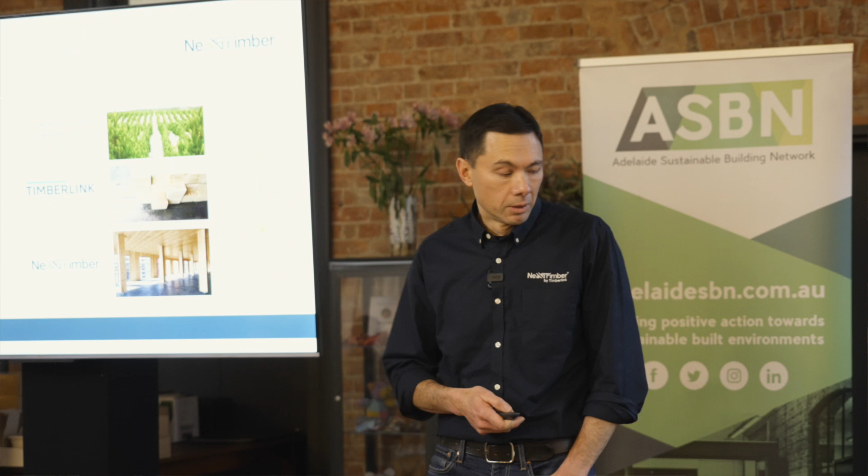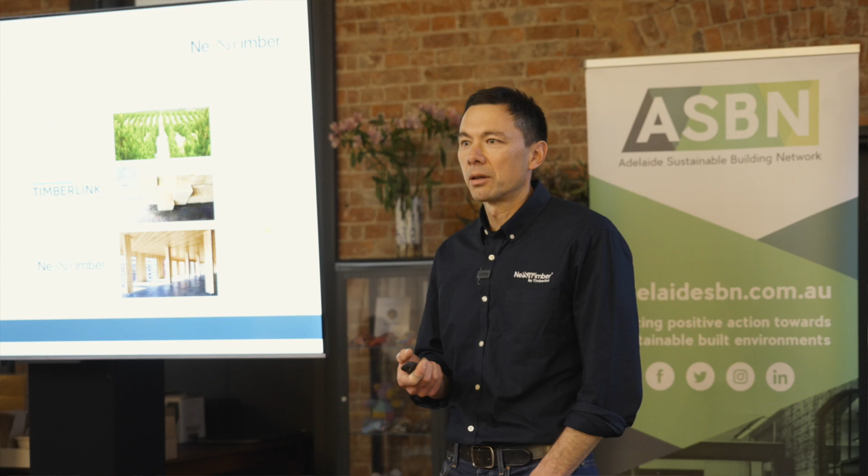Just a little bit about us as a business. Timberlink, we're in the middle - that's who I work for. NeXTimber is our business down the bottom, which is in the process of commissioning a new $60-odd million plant to build cross-laminated timber and glue-laminated timber. I'll go into that in a bit. But we're vertically integrated essentially with the plantation owners, so we're all owned by investment trusts managed by New Forests, now the second biggest forestry management company in the world. They manage about 10 billion of Australian and global funds.

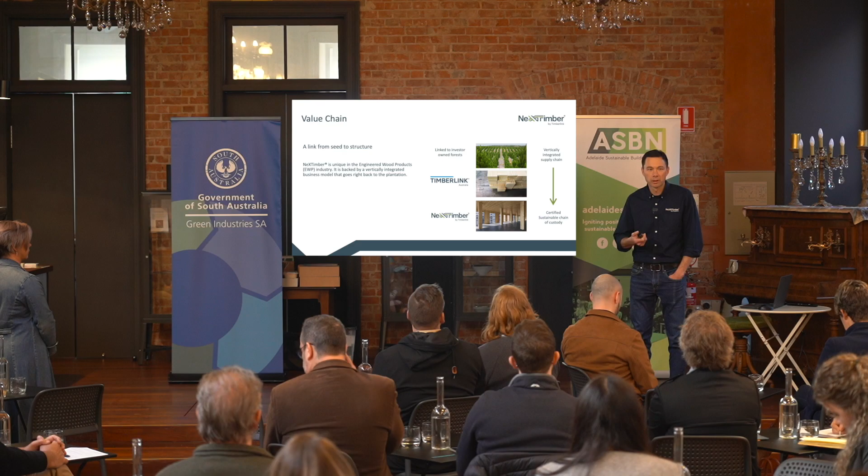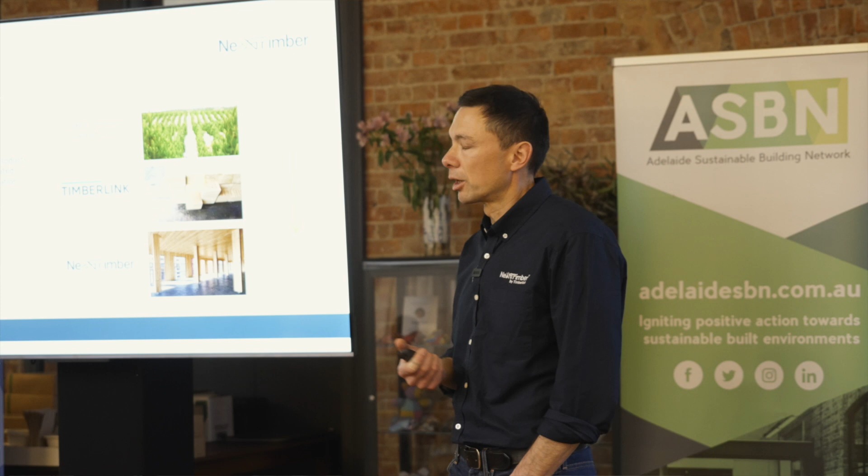Their initial differentiator in the investment market was around their sustainability, so they've been a huge supporter of what we do. Probably the other part of this supply chain is that it's going to enable us to have FSC and PEFC certification from beginning to end on the product. I can't claim that on the NeXTimber product yet because it's not being manufactured, but that's the intent - the feedstock's all going to be certified, and once we're underway, the product will be certified as well.

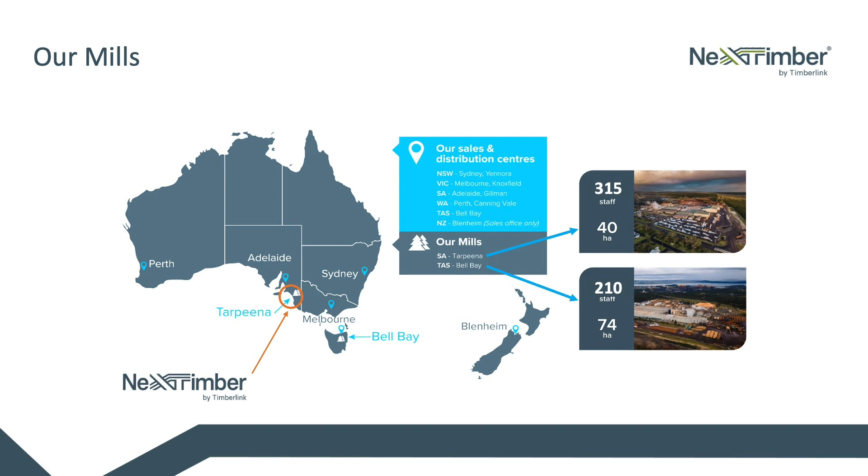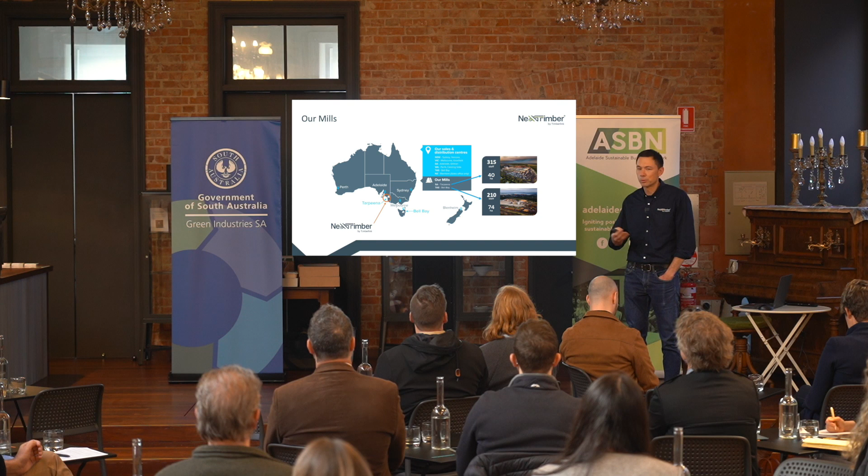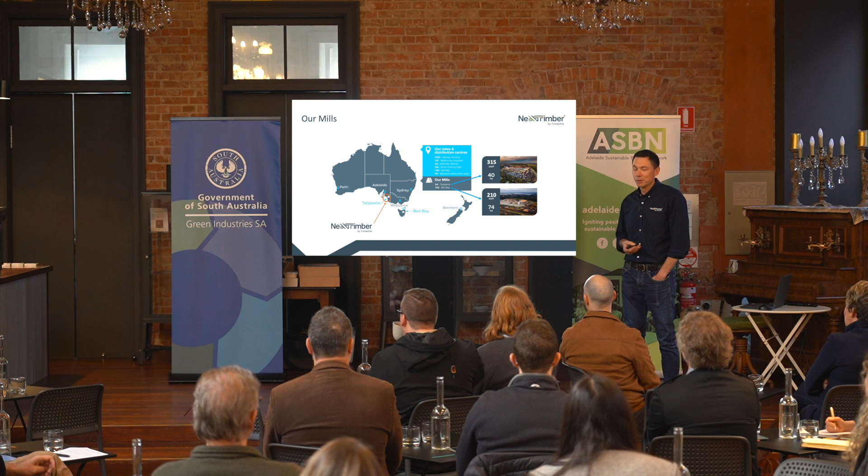We've got 2 manufacturing facilities and in total about 600 staff now. The manufacturing facilities are in the north of Tassie, that's where I'm from, and Tarpeena in South Australia, up near Mount Gambier. We're producing material from about 1 million tonnes a year of log. These are high-tech facilities - we use laser scanning, acoustic scanning, high-speed colour vision, all that sort of stuff. There's a lot of technology in these mills, it's not just a bunch of people with some big saws. It's a very capital-intensive industry - in 10 years of Timberlink, we've reinvested about 200 million into the business on some big upgrades and also some incremental work.

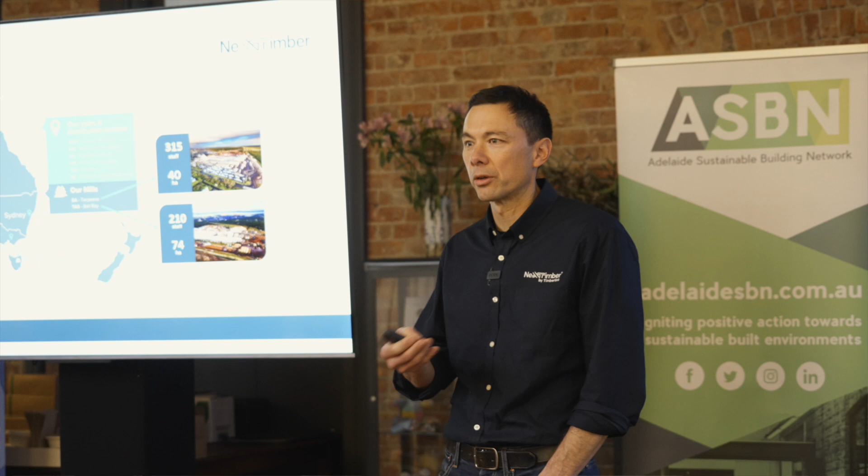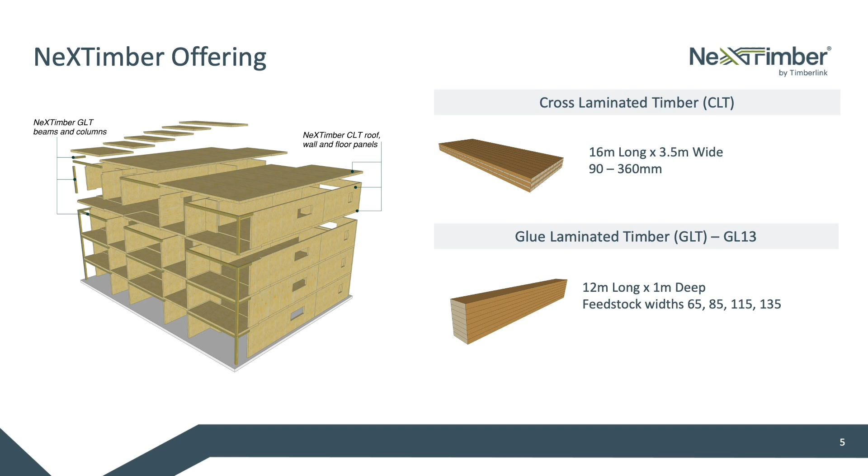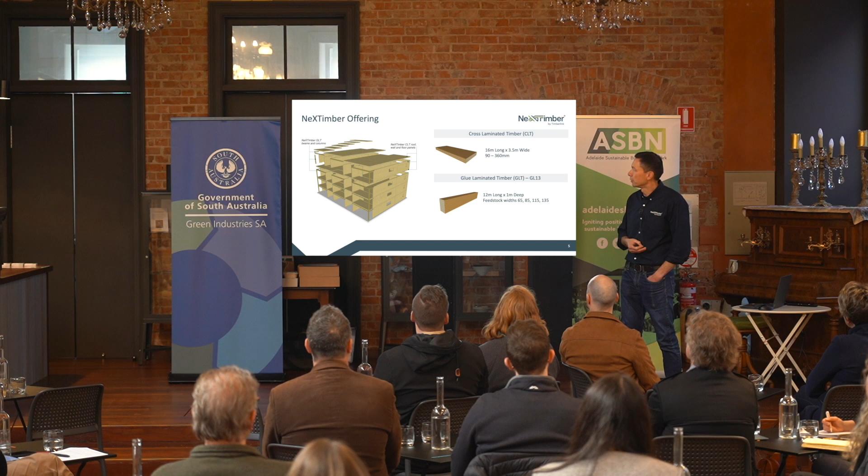This is the NeXTimber offering, a new facility at our Tarpeena plant. To give you an idea of scale, the building's 200 metres by 40 metres, a 63 million investment in total. We're producing 2 product lines: glue-lam timber beams, which you'd be familiar with for beams and columns - we'll be able to make them out to 12 metres long, 1 metre deep, straight or cambered. And cross-laminated timber, which for those not familiar with it, is big timber slabs used typically in multi-storey construction in place of concrete. The billets can be up to 16 metres long, 3.5 metres wide, 360 deep.

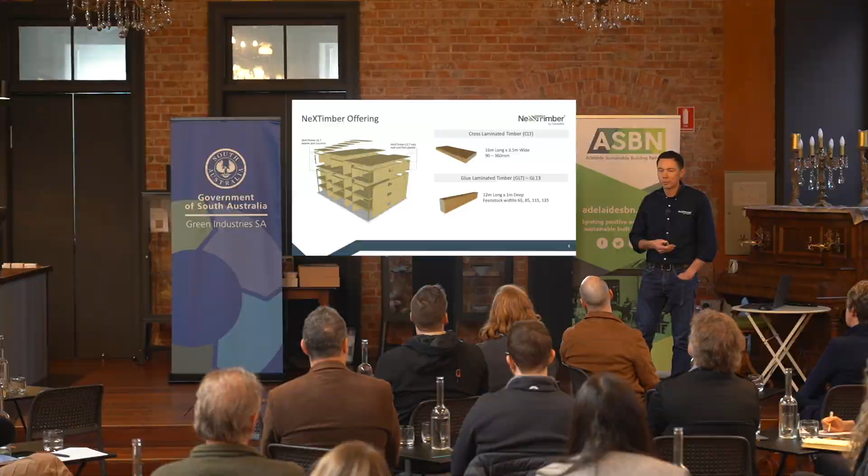As an anecdote, there were 3 of us that did all of the plant procurement and everything for this plant, and we did the whole thing over COVID. So when everybody's talking about the change in ways of work - to go from a mode where if we were spending that sort of money we'd have people backwards and forwards to Europe or the US - we could spend that amount of money with a high degree of confidence just from interacting with people on the internet and swapping 3D models of the factory. We're about to commission it, and so far it's been very successful.

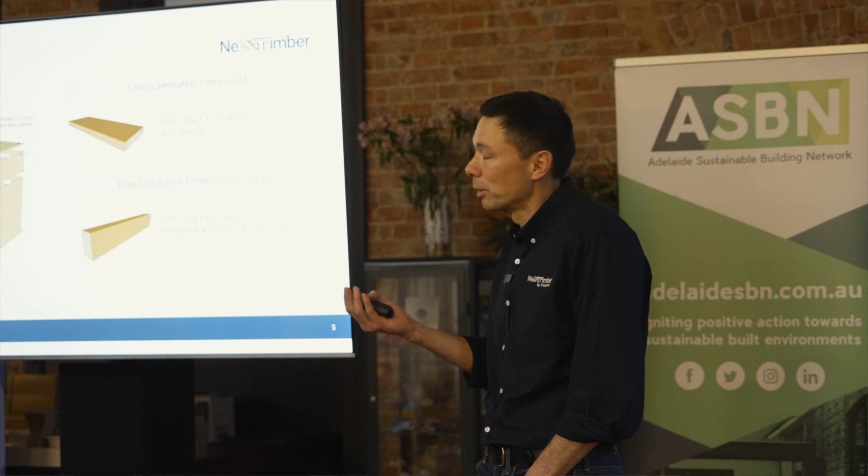I wasn't allowed to show you up-to-date photos of what it's like inside, but I'm sure once we've been running for a while and we've had a few visitors through, we'll be more than happy to run tourism packs for the right people. Everybody loves industrial tourism - even those who think they don't, they love it when they get there.

Technical resources - early on in the project, we sent a whole bunch of our material to a plant in Europe that had the same equipment and used the same adhesives, got a bunch of product made, brought it back and did all of the structural, fire, and acoustic testing. That's all now available. We've just released environmental product declarations - I'll talk about those in a bit of detail in a second.

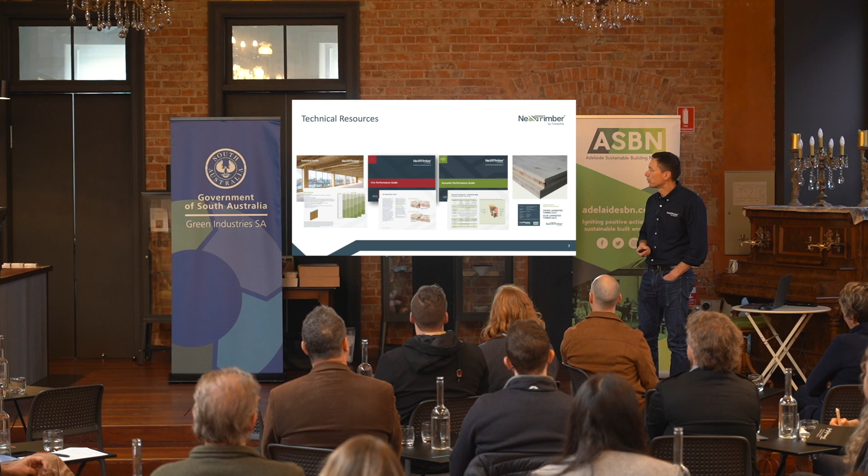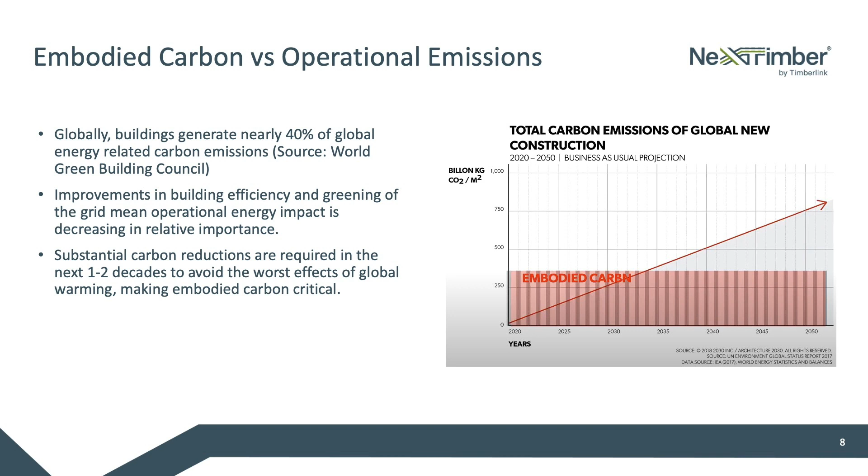And then here starts the meat of what I wanted to talk about from a technical point of view. You'll probably all be aware globally buildings account for somewhere around 40% of energy-related carbon emissions.

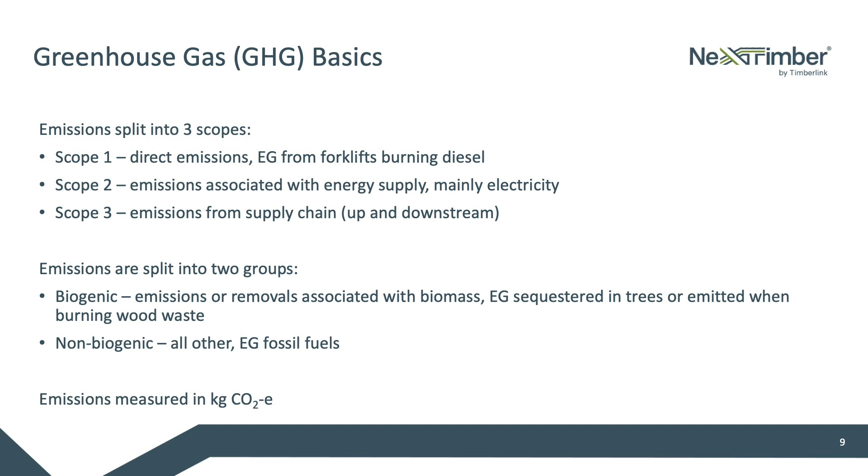As we heard in the last presentation, even refurbished buildings are now reaching really high levels of operational efficiency in terms of energy use. So the more efficient we are at using energy within buildings, and the greener the energy that goes into the buildings, the more important the embodied energy that goes into the building and construction becomes.

I guess as somebody mentioned before, we're having to turn this marathon into a sprint. We've only got a couple more decades to really make an impact.

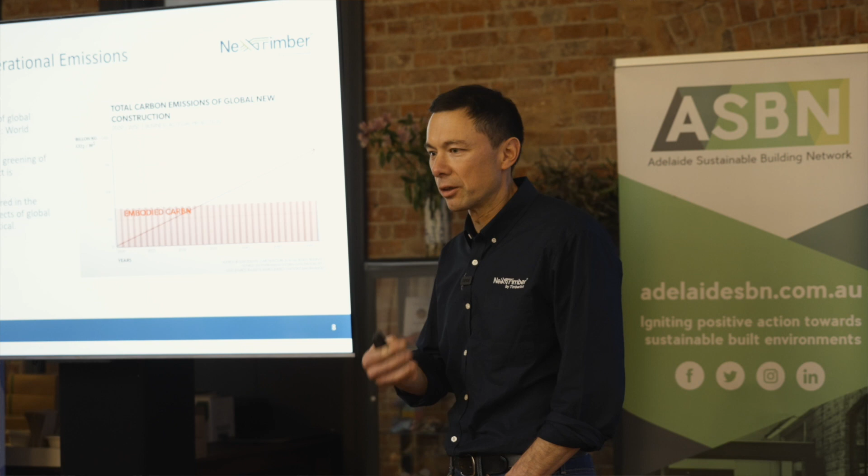I'm probably just preaching to the converted here, but just in case anybody's not 100% across this stuff, I will use a couple of technical terms.

So three scopes of emissions. Scope 1, us burning diesel. Scope 2, us using electricity. Scope 3, everything in the supply chain. For us, Scope 3 is around 99% on our latest footprint. So huge, but Scope 1 and Scope 2 is what you can control generally.

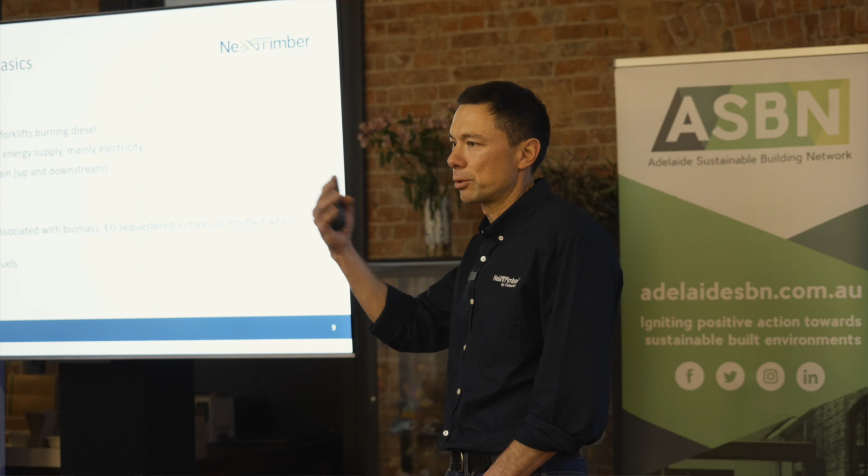And then importantly, think about your emissions in two groups. So biogenic - trees absorbing CO2 out of the atmosphere, turning it into a solid product, that's biogenic sequestration. Burning wood in your fireplace, that's a biogenic emission. And everything else, which is fossil fuels related.

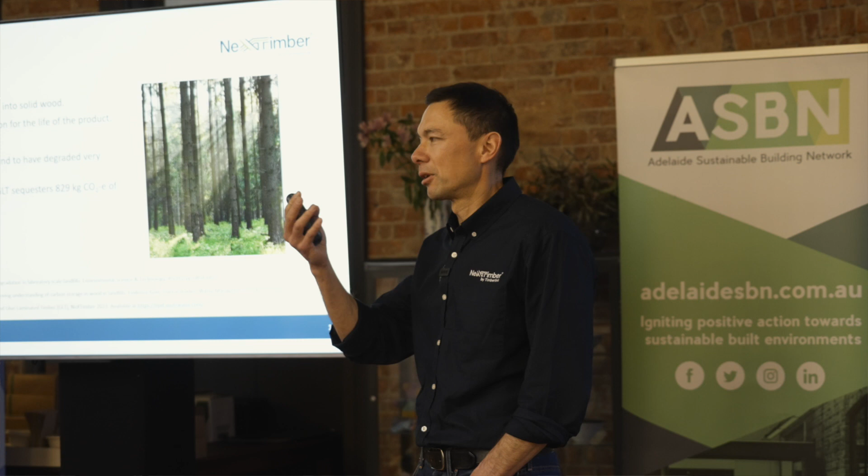So some basics, doesn't get much more basic than this, I suppose. When a tree grows, it sucks in carbon dioxide from the atmosphere, turns it into solid wood. If you look at IPCC reports...

There's another report, I can't remember the guy's name, but talking about ACCUs. This is really the only meaningful way we have of capturing carbon dioxide at great volume at the moment, through forests or woody biomass.

When these trees grow, they convert atmospheric CO2 into solid wood. We turn that wood into wood products, and then that biogenic carbon is sequestered within that product for the life of the product. So the more of that wood we can turn into long-lived building products, and the less into tissue paper, the better. That's a strong driver for us.

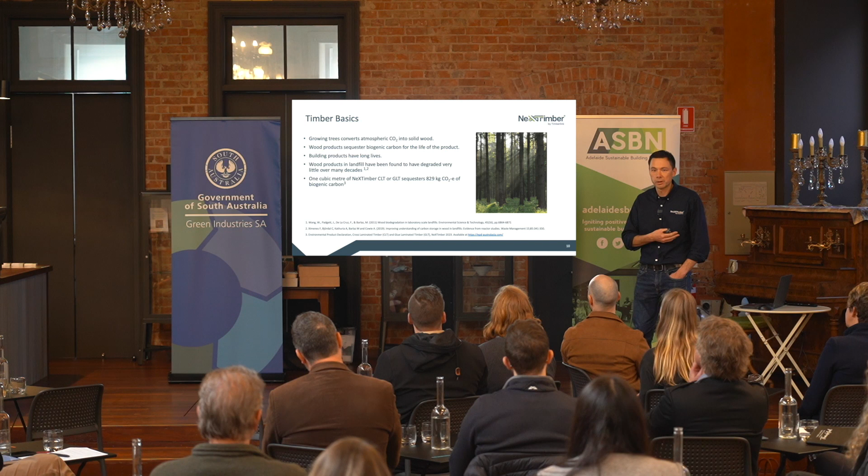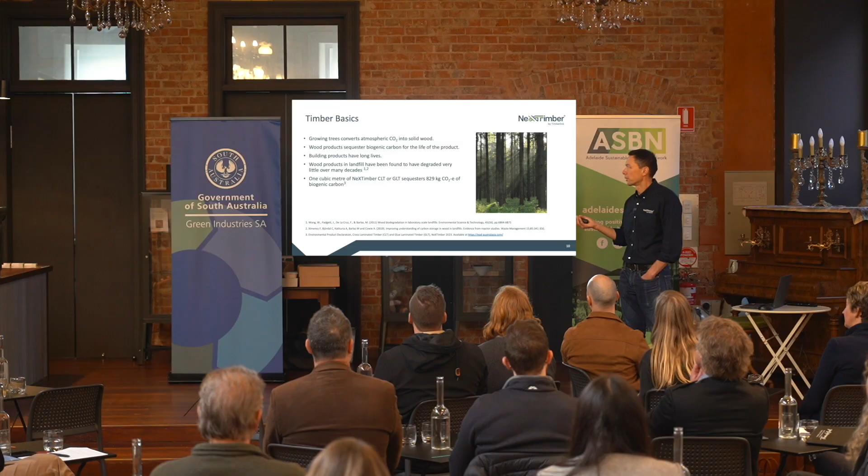Importantly, wood products in landfill have been found to degrade really slowly - in fact, virtually not at all over many decades. And in terms of just the biogenic, that atmospheric CO2 that's absorbed - one cubic metre of our CLT or GLT will sequester 829 kilos of CO2 equivalent for the life of that product. So that's just the biogenic.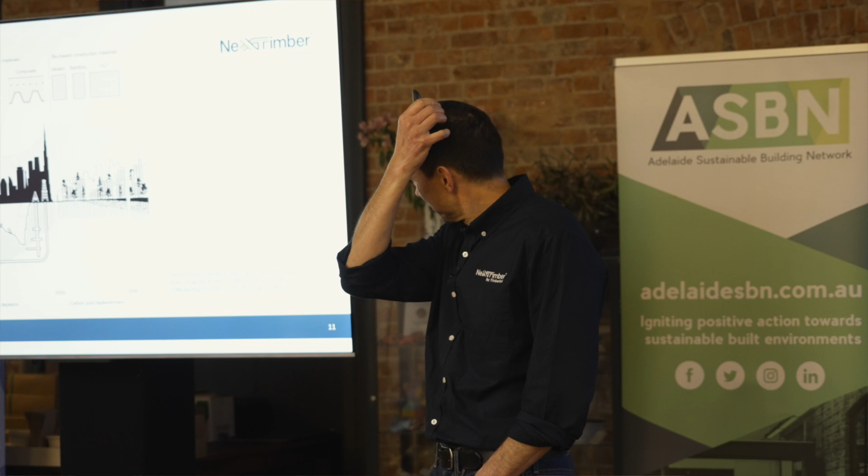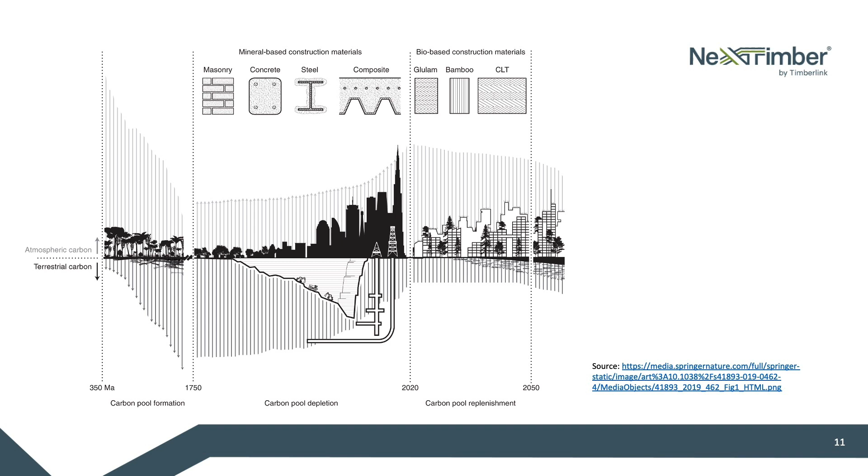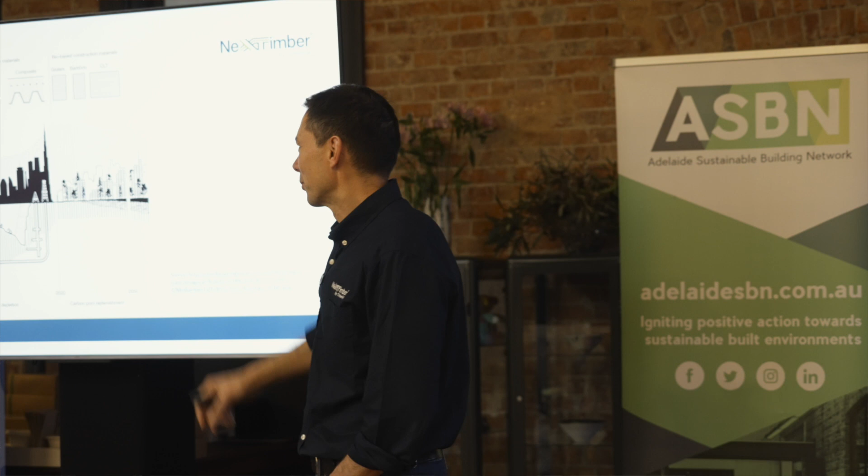One of my colleagues got me to put this in, and I wish he'd explained it a bit more to me before I did, but basically, that's what happens when you employ people who are much younger and cleverer than you. What we're talking about here is that the planet, until we started getting crazy and digging up coal and peat and burning it, did a pretty good job of absorbing CO2 from the atmosphere and turning it into oil and coal and those sorts of things. Since the 1700s, where we started digging things up and burning it, we've depleted the carbon that's in the ground and put it up into the atmosphere.

I remember this being pretty well established science when I was a kid, and that was a hell of a long time ago. So despite what climate deniers may say, the science for this is pretty well established.

The opportunity we've got now is to move on from concentrating our efforts on using these mineral-based construction materials, which are depleting the carbon pool, into bio-based construction materials, which are going to replenish the carbon pool. So suck CO2 out of the atmosphere, put it into the built environment, and then maybe put it back into the ground.

I can send you a link if you like the image, or I'll get Luca to send it to you. He's better with that sort of thing.

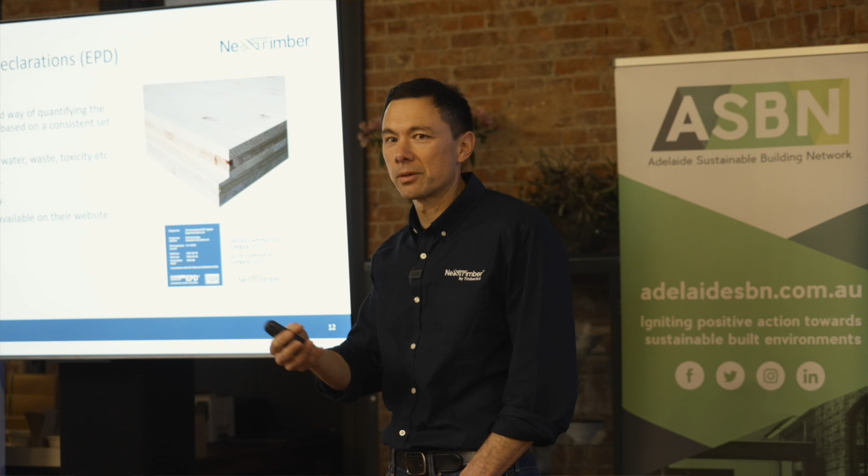EPDs - an EPD is the standardised, verified way of quantifying all the environmental impacts of your material. These are a full life cycle document. So if you're trying to establish the life cycle carbon impact of your building, you need to base it on a proper full life cycle EPD, not on an input-output hybrid kind of thing like the EPIC database. You really need to use proper EPDs.

They're prepared to ISO standards, they're verified by an accredited third party. Ours are registered by EPD Australasia. They're bloody expensive, in case anybody's wondering.

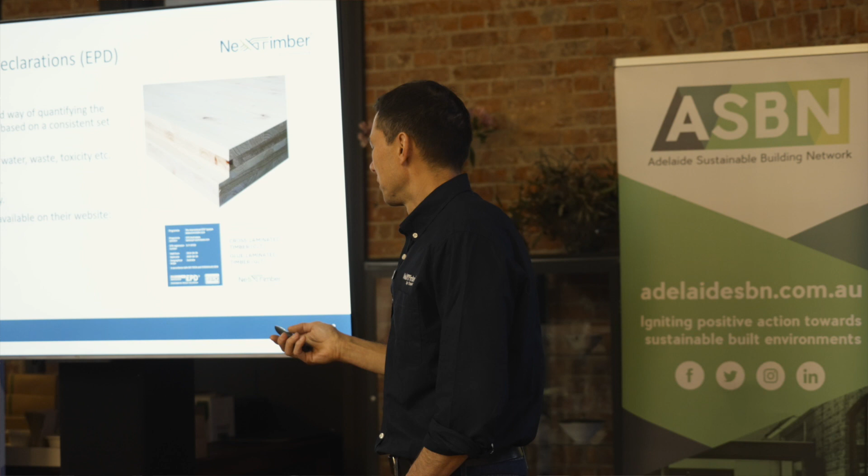Now to dig into them a little bit, this is out of our recently released EPDs.

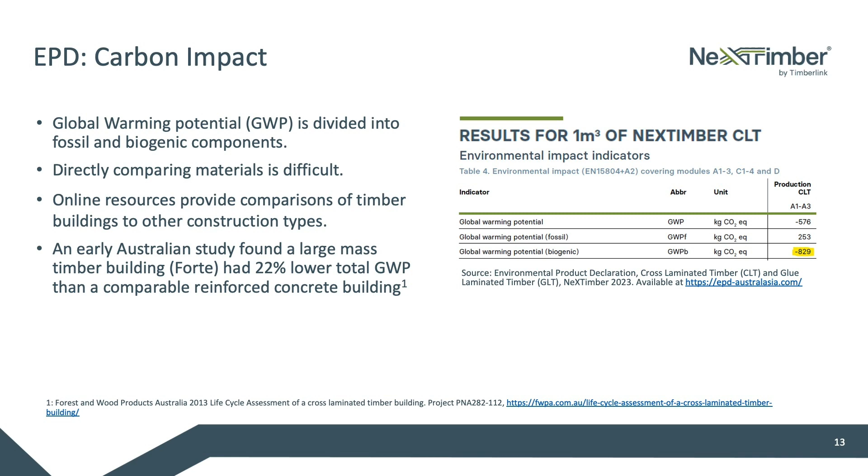If you're wanting to have a look at the carbon impact of, in this case, your building, you look at the global warming potential, which is these numbers here. Probably the thing to highlight here is if you were to look at any EPD for steel or concrete, this number is going to be pretty close to zero.

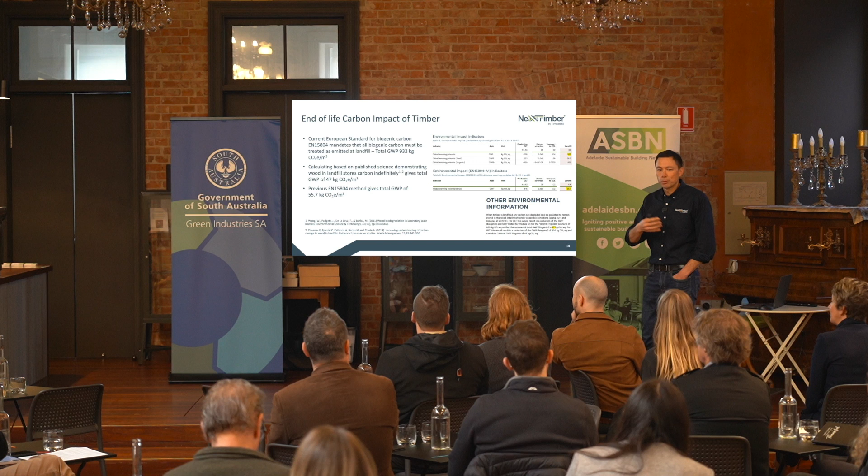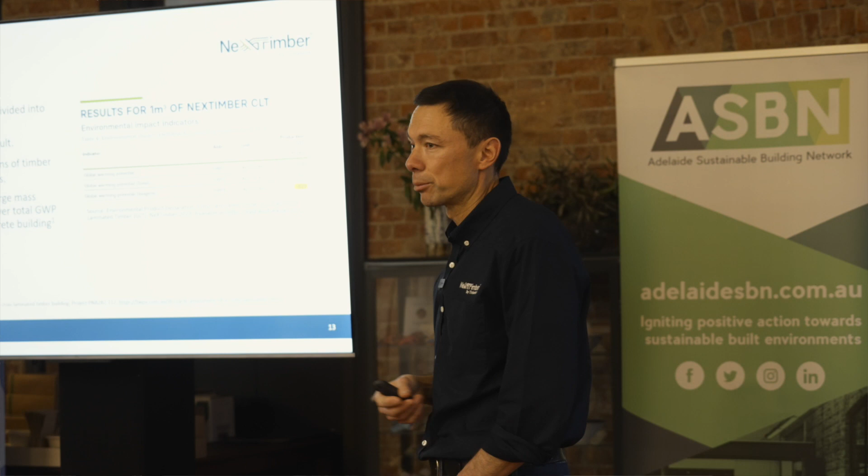If you're trying to compare two different ways of constructing a building and looking at the embodied energy, it's difficult on a product by product EPD basis. We as an industry are putting some efforts into trying to make that a bit easier. There have been some case studies. There was one from maybe 10 years ago, the Forte building in Melbourne, that showed a 22% lower total global warming potential using mass timber rather than conventional concrete construction.

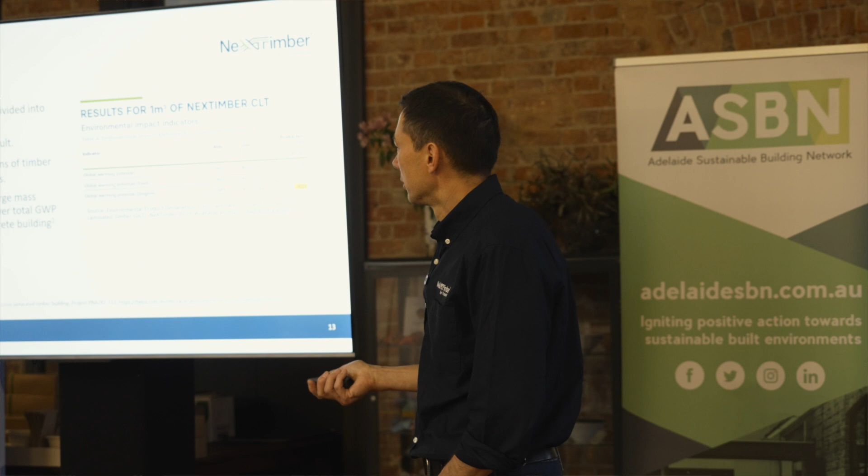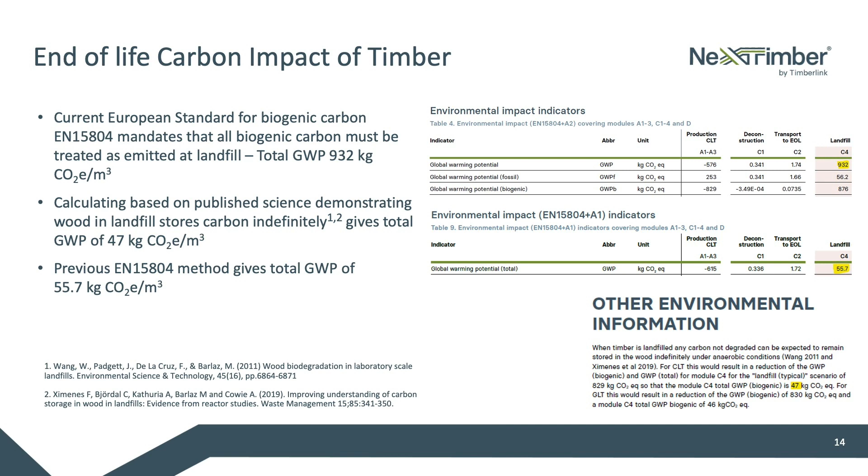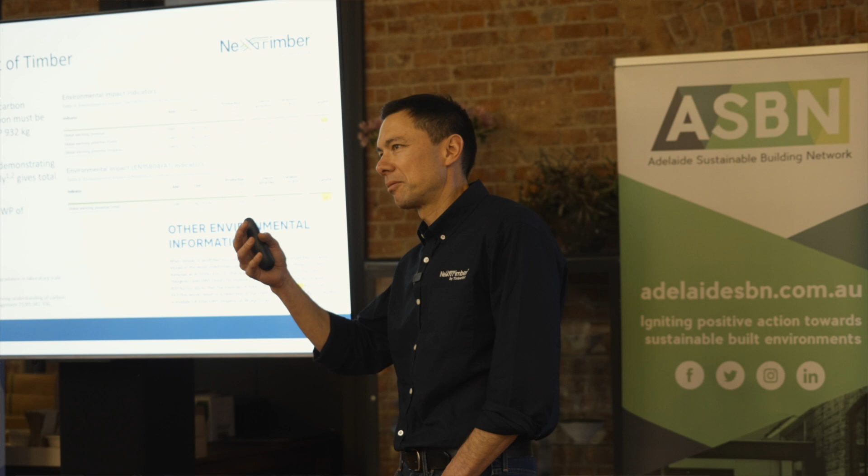One of the issues with EPDs is end-of-life treatment of carbon. When you think back to primary school, we learned about the carbon cycle. You've got your wood, and ultimately you might bury that wood in the ground. What happens to the carbon? Science has told us for many years that carbon's kept in the ground, kept in the form of wood for thousands and thousands of years. You wait millions of years, it'll turn into coal. That's the carbon cycle that everybody's aware of.

Unfortunately, the latest version of the EN standard that deals with biogenic carbon mandates that in our EPD, we have to treat all of wood at landfill as being directly emitted to atmosphere. And I guess what I'm saying to you is that that's actually incorrect. I understand it was done for political reasons in Europe. They don't like landfill, so they thought they'd just not worry about the rest of the world and set a rule in a scientific document that was scientifically incorrect.

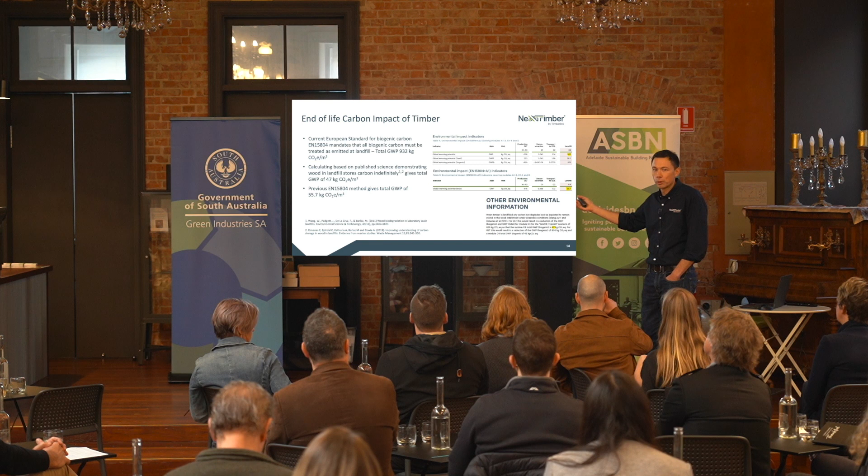So anyway, this number here under the current rule is large. Biogenic carbon, they say, is emitted to atmosphere. If you look at the last version of that standard, and we put these numbers in our EPD because we're allowed to, the number was 55.7 instead of 932. So with the change of the standard, they've basically come out with this completely misleading result.

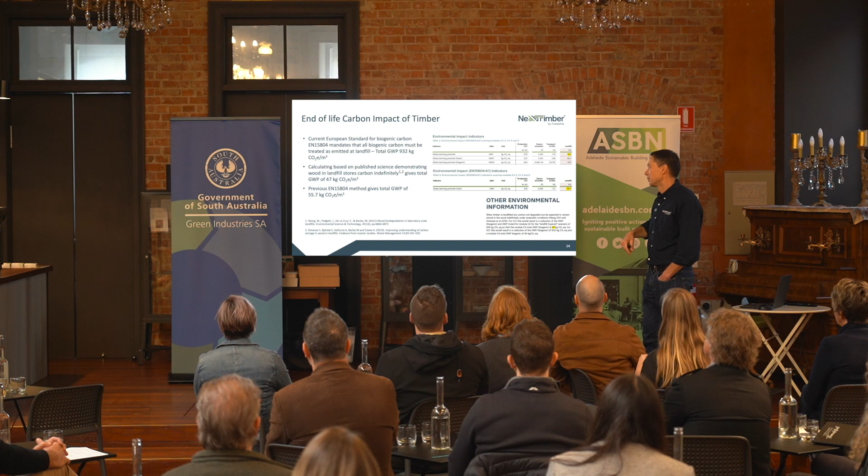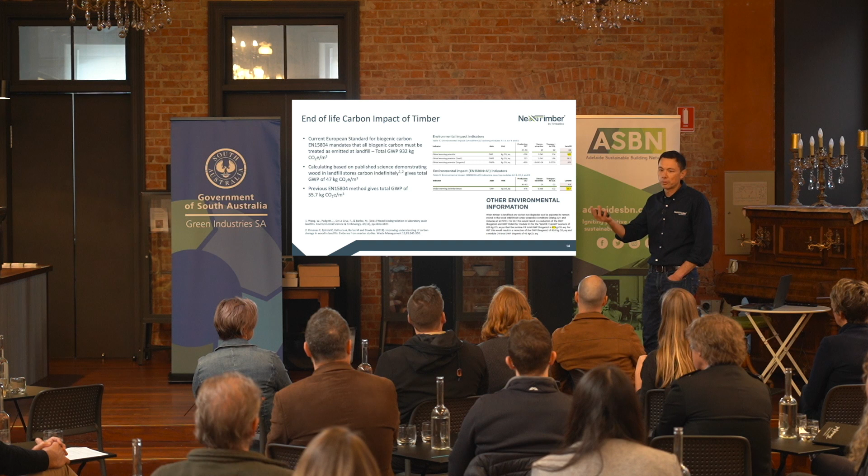Also in our EPD, we've quoted these papers, feel free to look those up. This is the research I referred to demonstrating that when you put wood in the ground, it stays as wood, doesn't get emitted to atmosphere. So I guess what I'm saying is if you're really interested in the actual life cycle impact of wood in a building, if the wood goes into a landfill, it's not all emitted.

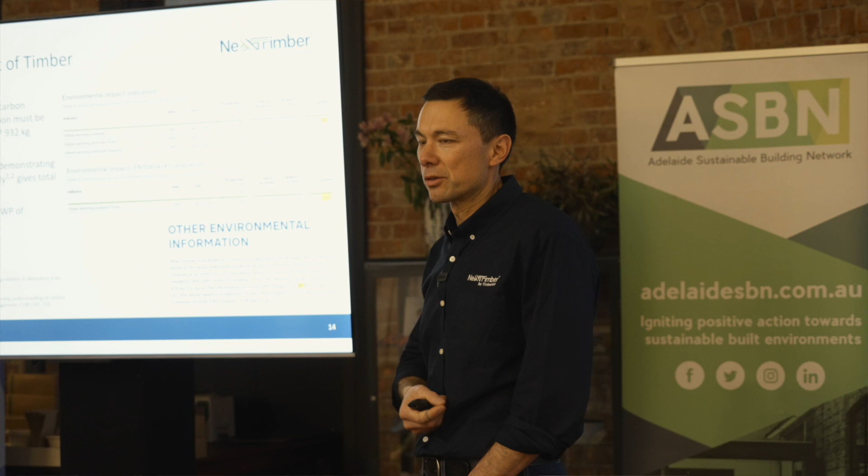If you burn it in a furnace, it is all emitted, but even in that case, it's still essentially carbon neutral energy in terms of biogenic energy. It's not like digging up coal because we've regrown all of those trees.

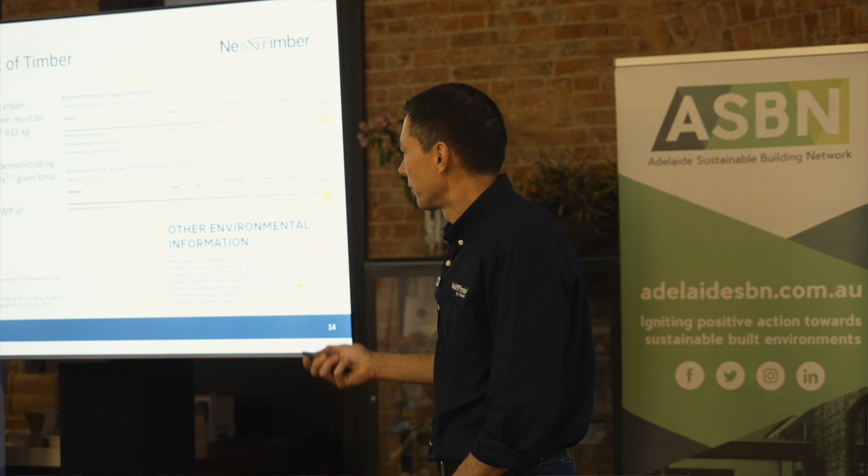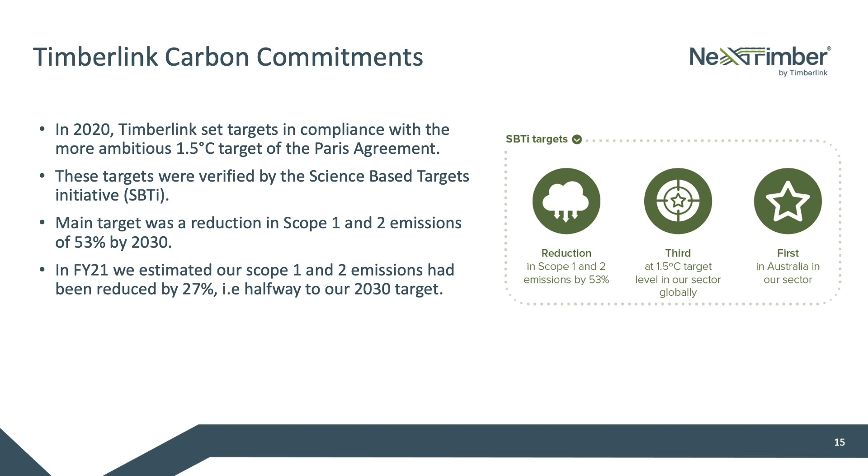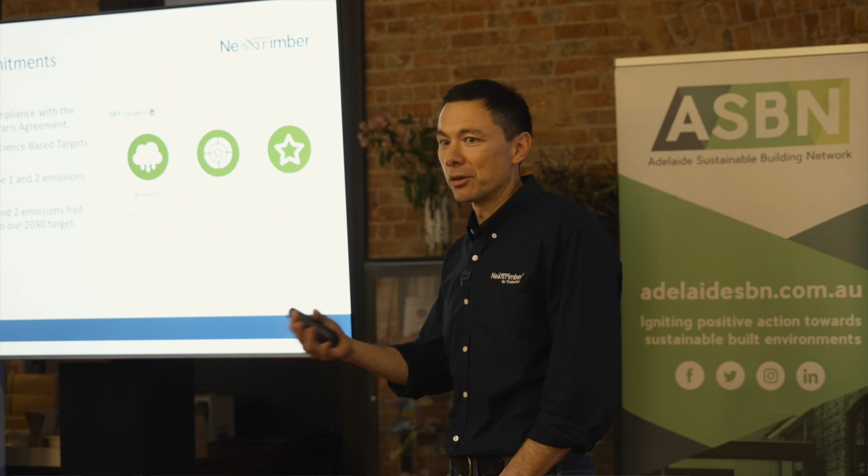And then just back onto Timberlink. One of the things I really wanted to do was to commit us to carbon targets. So, you know, all this talk about biogenic carbon, that's fantastic, but as a manufacturing industry, we use energy. We use forklifts that currently run on diesel, hopefully won't be for too many more years. We use electricity, so I think it's up to us to reduce our carbon impact.

So a couple of years ago, we went through a process, got our carbon footprint done, calculated carbon targets according to the rules of the Science-Based Targets initiative. If anybody's not aware, that's the big international body that dictates how every industry and every country has to decrease their emissions in line with the Paris Agreement. We chose the 1.5 degree target because that was the more ambitious one, and these are the targets we ended up with.

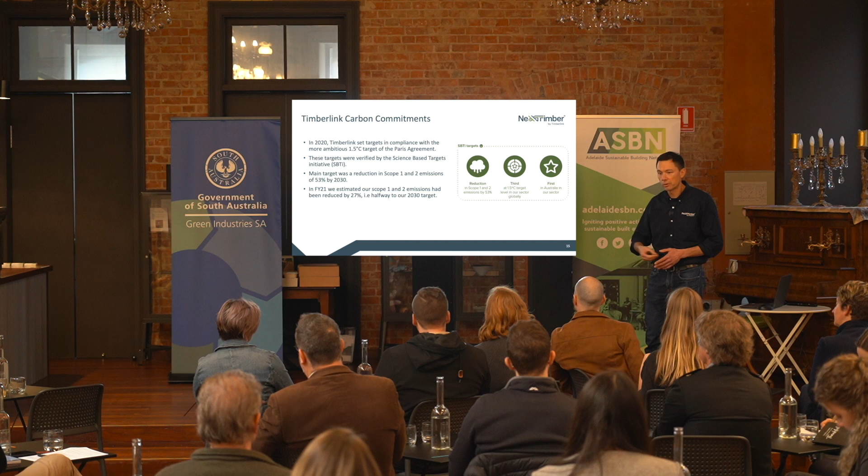So the key one is a 53% reduction in Scope 1 and 2 emissions. After 3 years, we'd got halfway there on our way to 2030, so we're pretty comfortable with where we're going with that currently. We've just about finished off the process of redoing our carbon footprint and resetting targets, and because they're science-based, the targets get harder. So this 53% will go up to about 60.